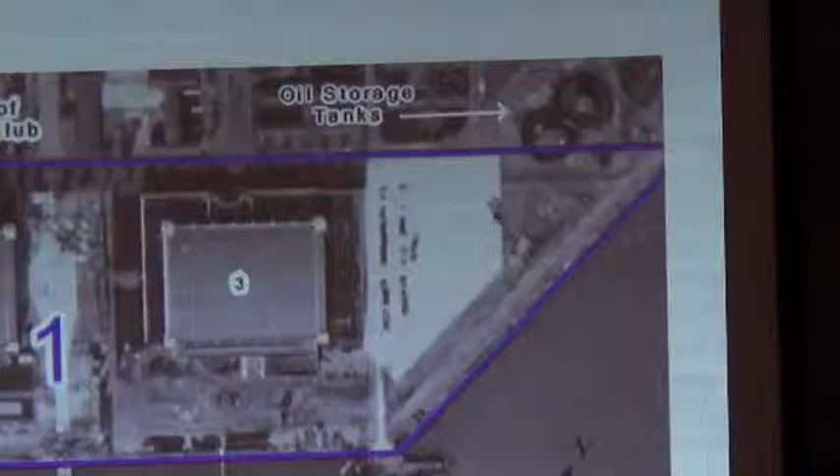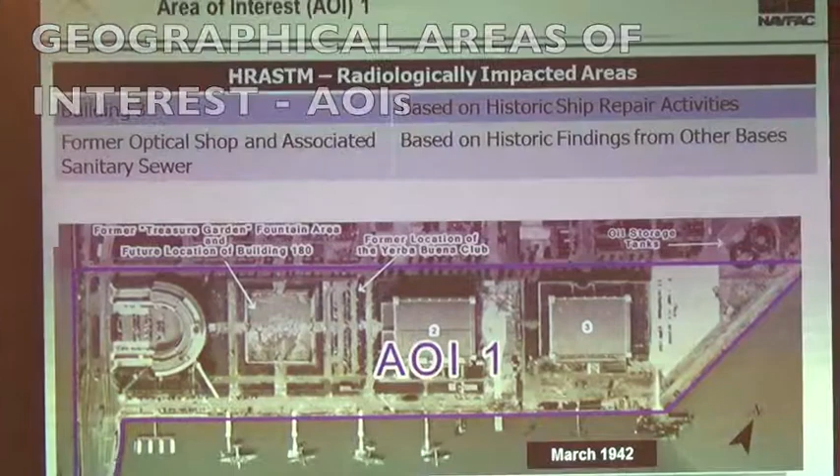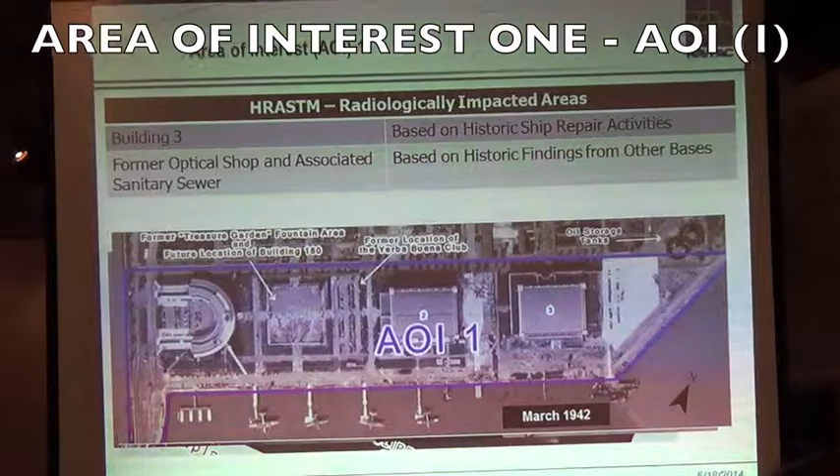So the last thing I want to do is give you an idea of how we went through each site, at least from a visual point of view, so you can link up what we're talking about. What we try to do is figure out how we're going to look at the entire base. We broke it into what we're calling areas of interest—just geographical areas that make sense to cut the base into chunks and look at one section at a time. They're unrelated to anything else, just to make that clear.

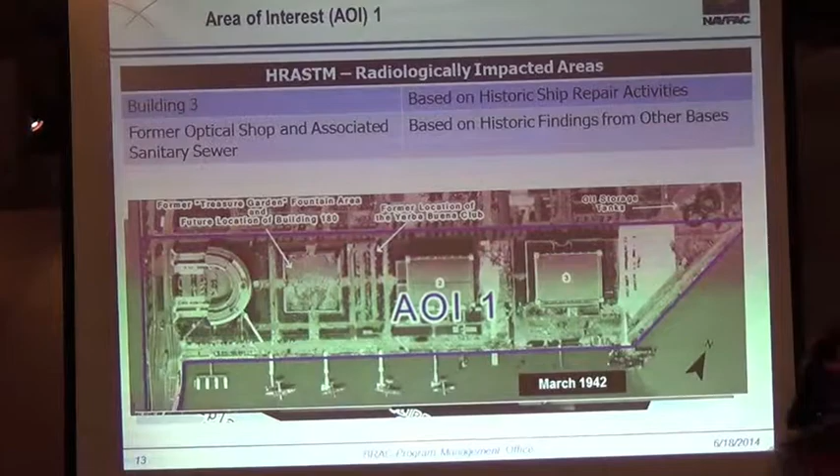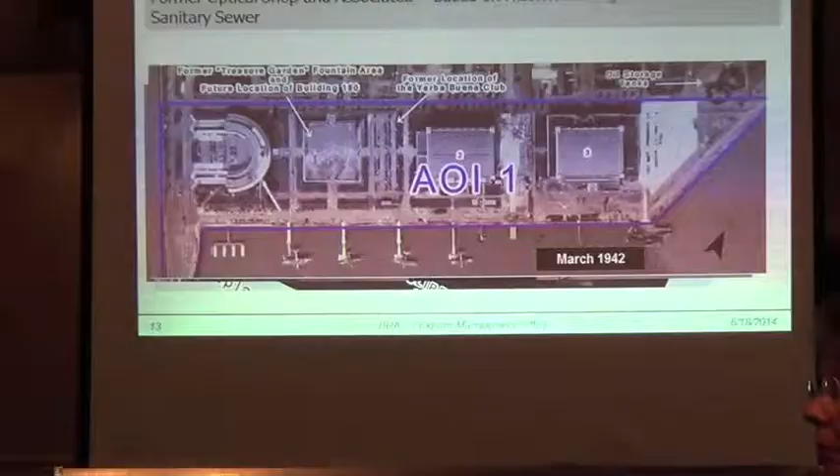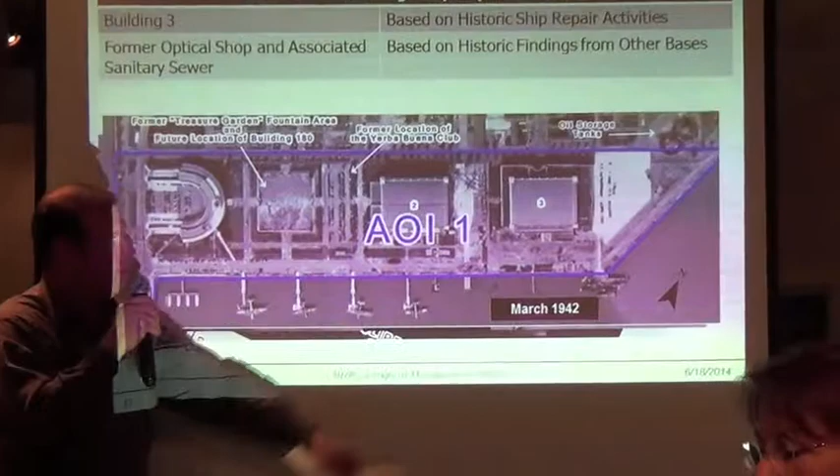So we have area of interest 1, and there you have building 3. As we talked about, on top of the building there's the optical shop, and inside, World War II activities. What's key to note here is the date, March 1942, the beginning of World War II. This looks almost exactly as it did during the 1939 Exposition—you have buildings 1, 2, and 3, and a parking lot right there.

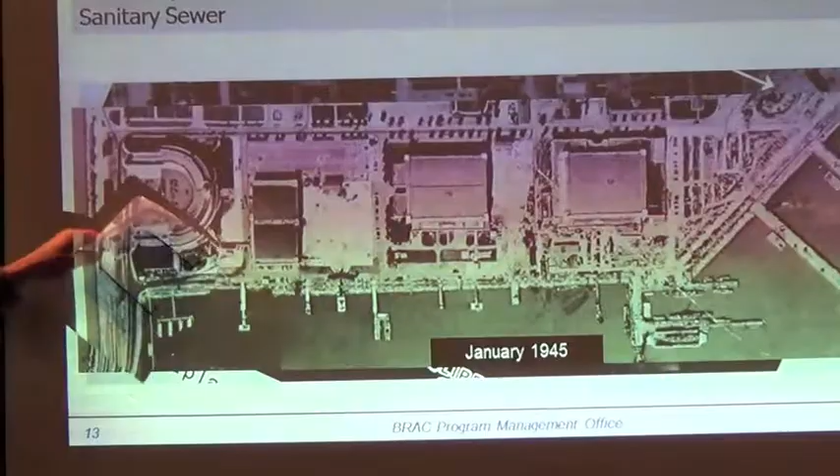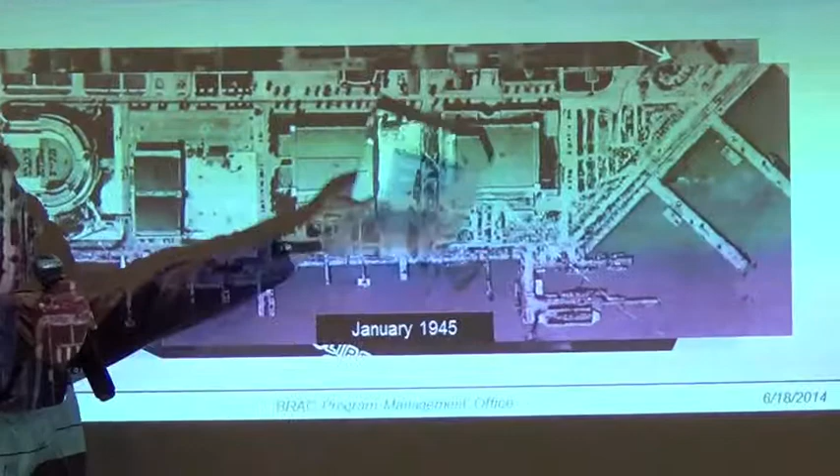So you'll see that all this activity is going on in 1945, with pieces of ships going back and forth inside that building. Also, the famous optical shop is right in the corner there.

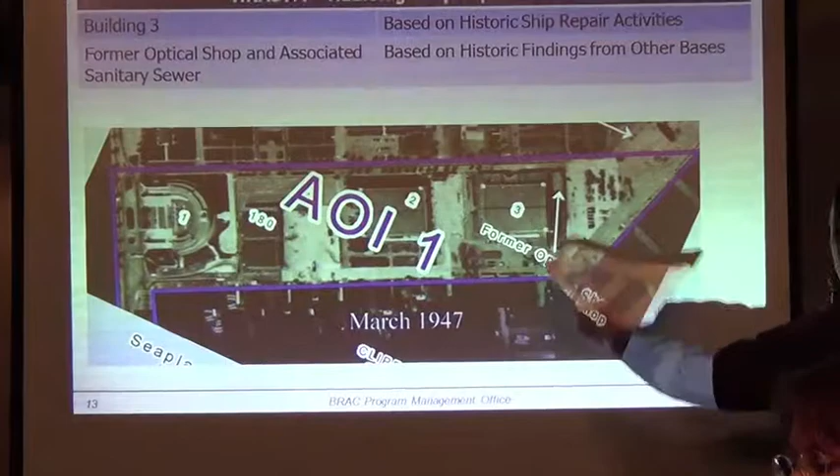And then you go to 1947, things are winding down, just a shadow of its former self. It was demoted from a frontier base to something else, and never saw action after that. However, the optical shop remained, and it was eventually torn down in the 60s, late 60s.

So, because of that activity during World War II, Building 3 is impacted. And because of the optical shop on top of Building 3, this sewer line, the sanitary sewer line, is impacted as well.

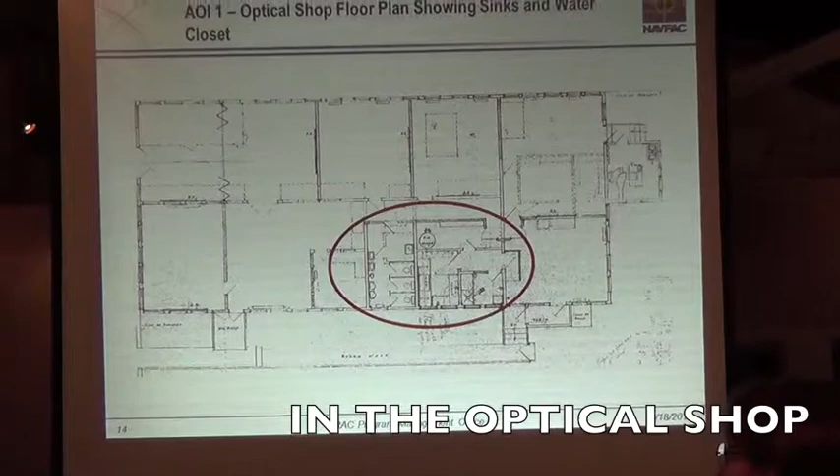Here's a nice little schematic we found in the depths of Building 1—the optical shop floor plan, where clearly you had some laboratories, sinks, and you can still see the hole in the floor where the drain went through, across the ceiling of Building 3, down, and connects to the current system today. So clearly there was a drain that needs to be investigated.